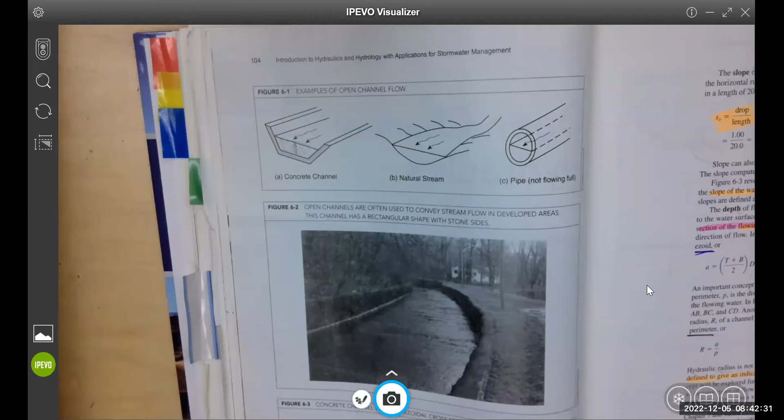We are going to move into, that's weird, doesn't show it. Oh yeah, it does. Open channel flow. So today's going to be just about definitions. I think we'll define 4 or 5 things about open channel flow, and then we'll work our way to what's called critical depth and some flow rates. So this is not my area of expertise. I'm going to hack my way through it. This is very civil engineering, but it's also fairly interesting and not too difficult in the beginning.

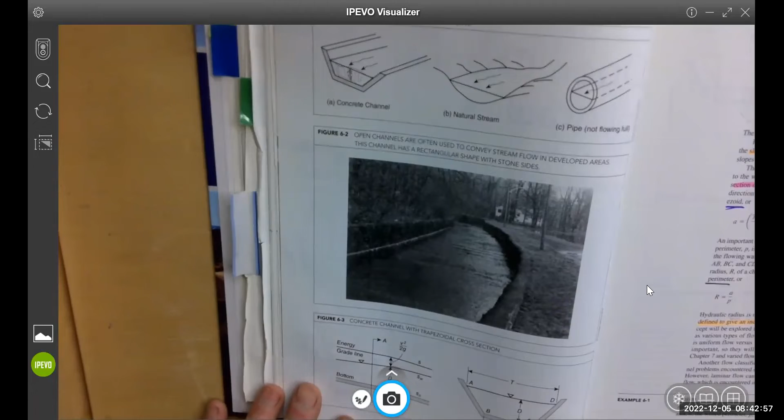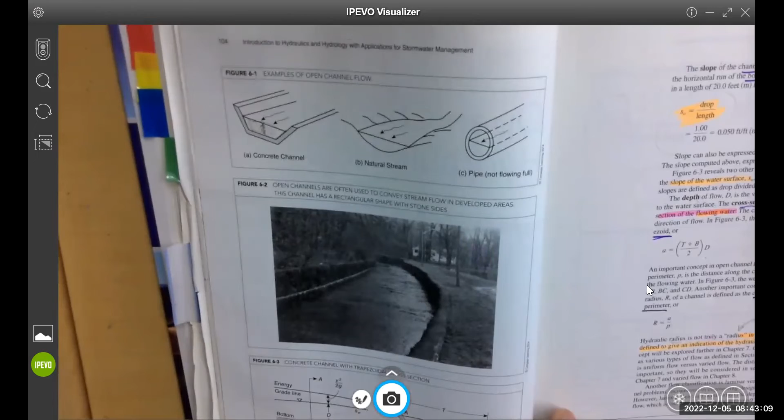So what we're looking at is these kinds of systems that transport water long distances over very low grades. So they're called channels or weirs. Oh, wow, lights are out. They can be concrete channels, right? They can be natural type streams. We did a little bit of that already. Not very often are they full culverts, but I think they do exist out there somewhere. They can be concrete or earth. You see them all different ways.

The things that we have to define so we can move towards flow rate is this information and this information. So we all know what a cross section is. That's chopping the channel to give us a cross-sectional view, right? So we'll need both of those. We'll need this side view and some information. And we'll need the cross-section to get things like wetted perimeter. So our goal is not just the depth, but what's called the critical depth.

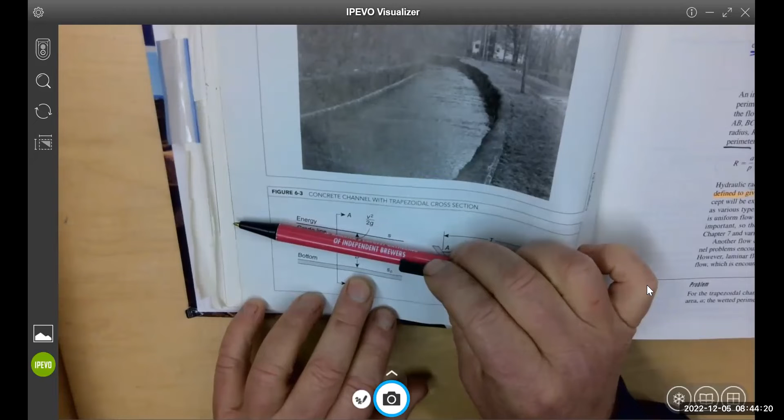So if you think about this thing, it's not a stagnant piece of water, right? It's moving. So we have friction on the sides and the bottom that's actually holding the water back. And then we have a slope that's trying to get the water to flow. So water's going to sit pretty close to horizontal in a channel, right? It doesn't sit parallel to the bottom of the channel. It sits horizontal and then it flows, which is really strange because there are just portions of it that are horizontal. You can kind of see how it moves down with some rippling effect, but it's really trying to find its horizontal, right? It's trying to find level.

So we need to know things like the slope of the bottom, that's S sub O. We need to know the surface of the water and the depth at a cross section. So when we talk depth, it's at a cross section, right? And when we slice it and look at it from this angle, we see the depth. There's a couple depths that we're going to work with. There's the regular depth that could be given, and then there's what's called a critical depth.

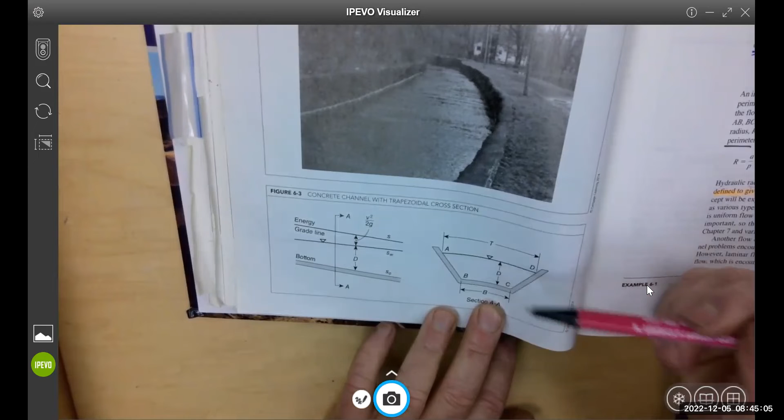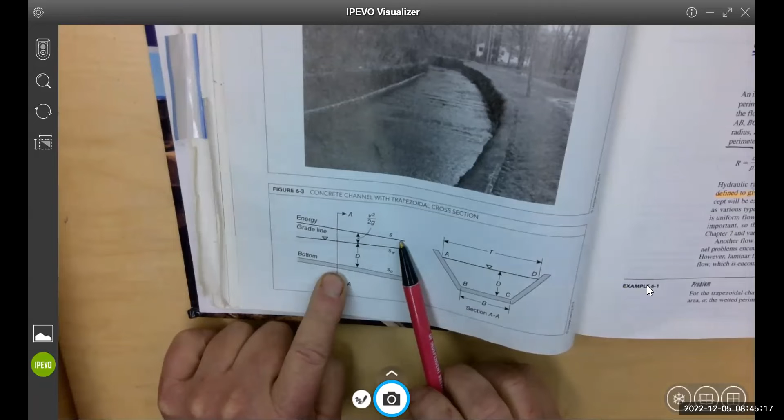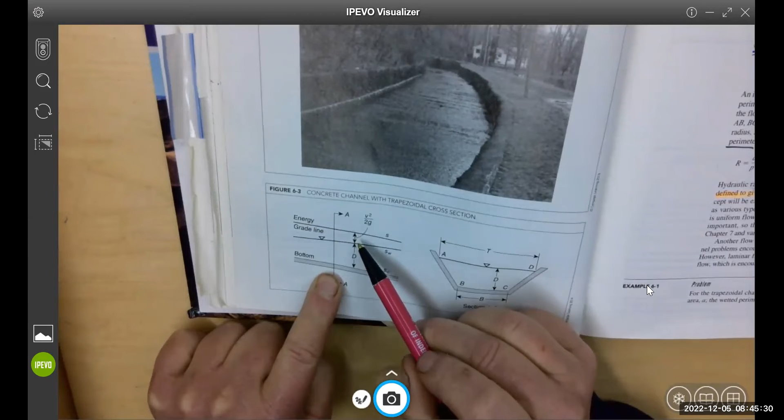But that'll be on Wednesday when we calculate those. Then there's this thing called the energy grade line. The energy grade line is parallel to the bottom surface, so it's parallel to the slope. Okay. And then the kinetic energy due to the moving water is this distance right here, the difference between the energy grade line and the water surface.

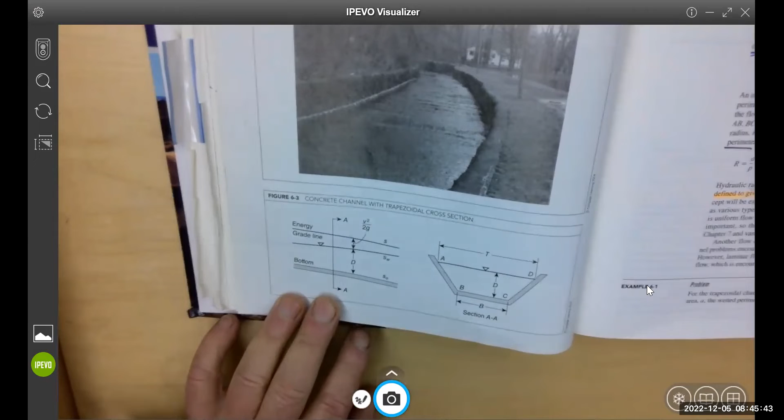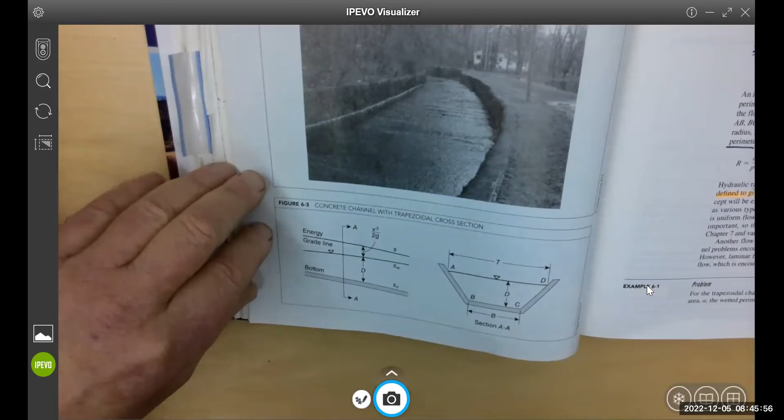Okay, so obviously the energy grade line is not a real thing. We can't see it, right? But we can actually calculate the EGL, energy grade line. There's also something called a hydraulic grade line, which we may calculate if we get that far. All right, so this is how it sets up. What we need to do is be able to calculate a few things just based on information given to us, like the slope.

Slope's pretty simple, right? Everyone knows what slope is. Anyone know what slope is? So I'm going to call it S sub O. Yep. Say again. Yeah, rise over run. That's exactly right. So the term that they're going to use is vertical fall. So that is the rise.

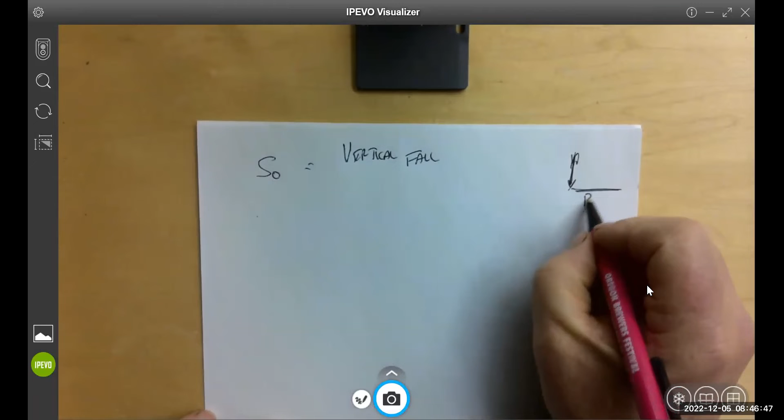So if we have, oh, yeah, sorry, I need it up there though, because I'm going to be here. Focus. There we go. Right, so that's the vertical component, rise and run. This is normally run. So they're calling it vertical fall over horizontal run. Right?

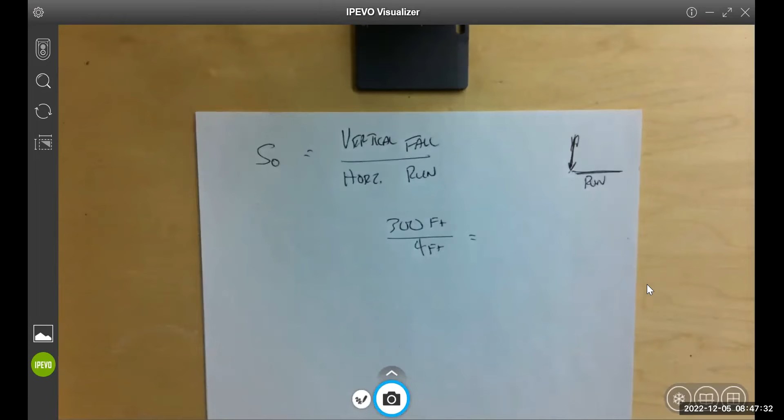So if we have like 300 feet of weir or channel, right? We're going to transport water 300 feet and we have a fall of 4 feet. We would get this slope. So what's that give us? 300 divided by 4. Oh, I got it the other way around, don't I? Yeah. 4 feet. Sorry. Vertical fall's on top. And 300 feet. I'm like, wow, 75. That's a big number. Right? It should be pretty small. Less than 1.

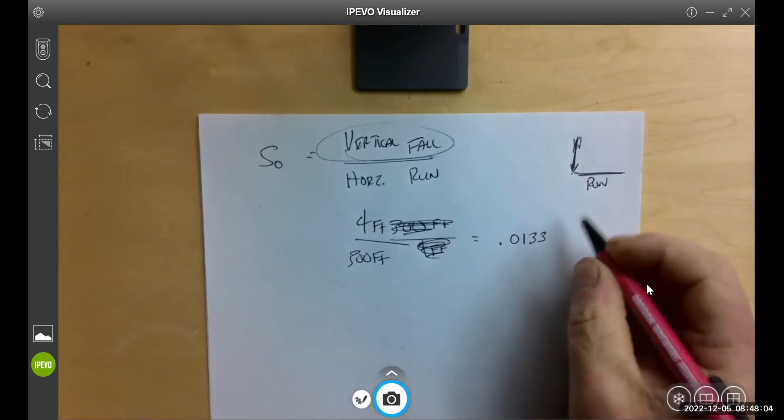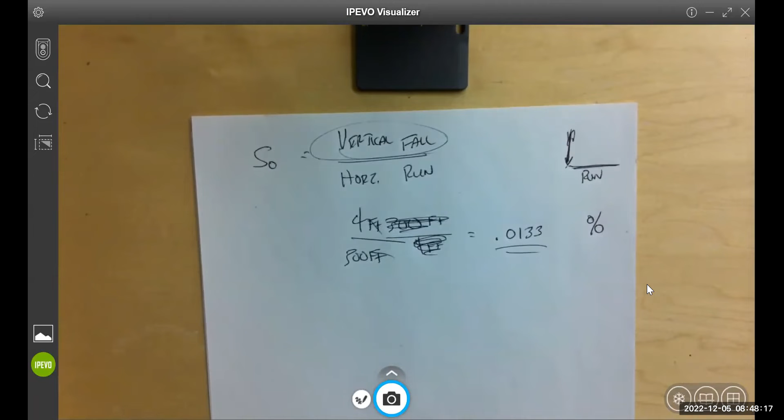So what's that? 0.0133. Right? And the units are none, unitless, because we have feet divided by feet. So that's the slope, but we also often give the slope in percent, right? So if we just multiply by 100, we get 1.33% slope. That's a pretty common ratio. 100 to 1, 300 to 4, all of those kind of ratios are going to work well

with open channel flow. If you get it going too fast, if you have too much slope, then your water is going to turn turbulent and you'll get a number of problems from that. You'll get your weirs, if they're natural weirs, you'll get some eroding in those channels. If they're concrete, not so much, but we don't typically want a turbulent flow. It's just less efficient. Much less efficient.

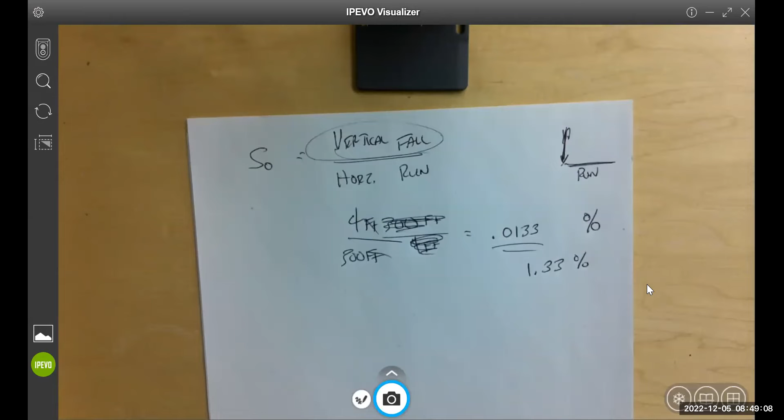All right, so the other thing we need to be able to calculate is wetted perimeter. So if I have a channel that is rectangular, let's say it's 5 feet deep and the water is 3 feet and we're 6 feet here. The wetted perimeter is just what it sounds like. It's the wetted area of the channel. So we're going to use wetted perimeter, we're going to use slope, we're going to use hydraulic radius, all of these things that we want to define and be able to calculate. Once we have that and some friction factors, we can come up with the flow rate of these channels.

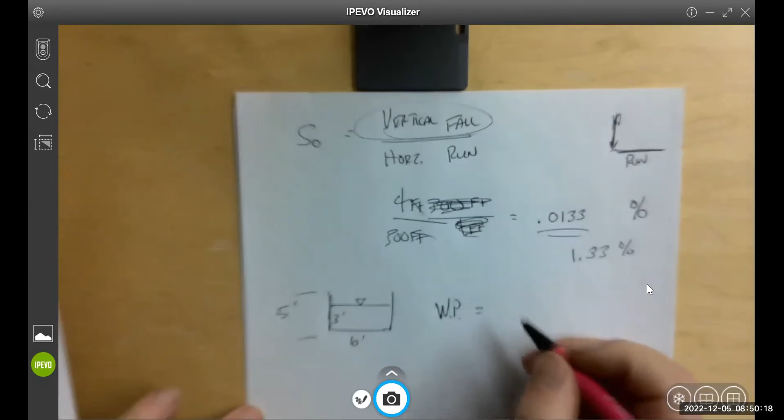So wetted perimeter of this, and I just say wetted perimeter with a WP. I'm not sure what they use for wetted perimeter. Just P, looks like. How much? 3 feet plus 6 feet plus 3 feet, right? Yeah. 12 feet.

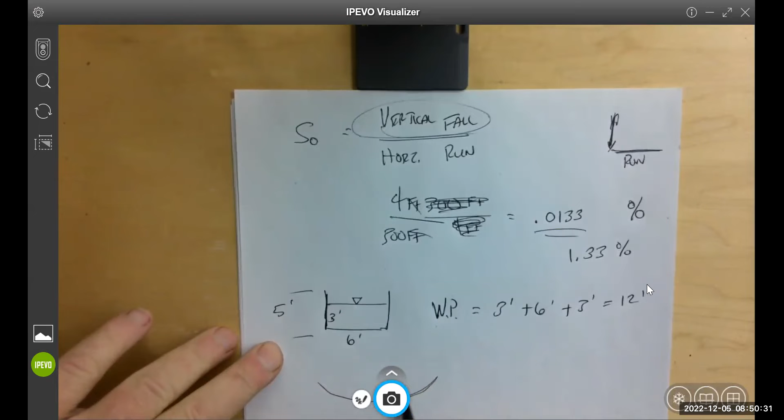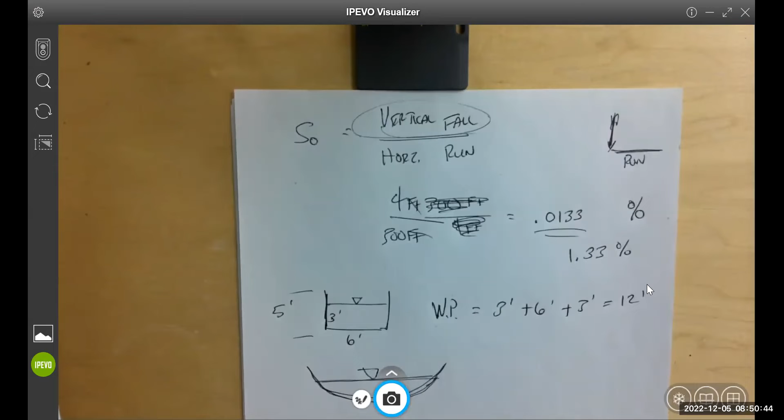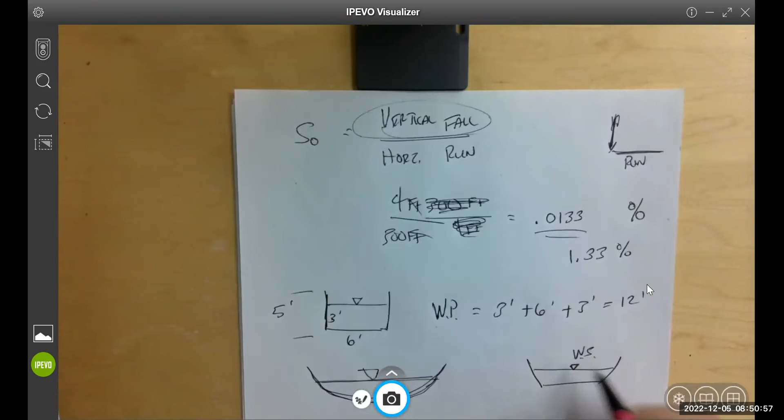A little more challenging if you get a channel that looks like this. Then we need some length of arc calculation, so you might have to look that up. I think they have some arc length calculations in the book, or even a trapezoid, right? And this usually is water surface. A little triangle. So this can become more difficult if it's just not rectangular. If it's one of these other shapes, we still need to be able to calculate the wetted perimeter.

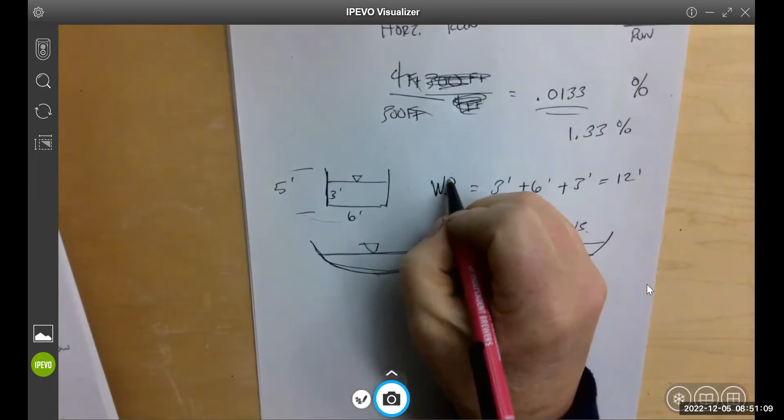Next is hydraulic radius. I use HR. What do they use? They use just R. And the hydraulic radius is the area divided by the wetted perimeter.

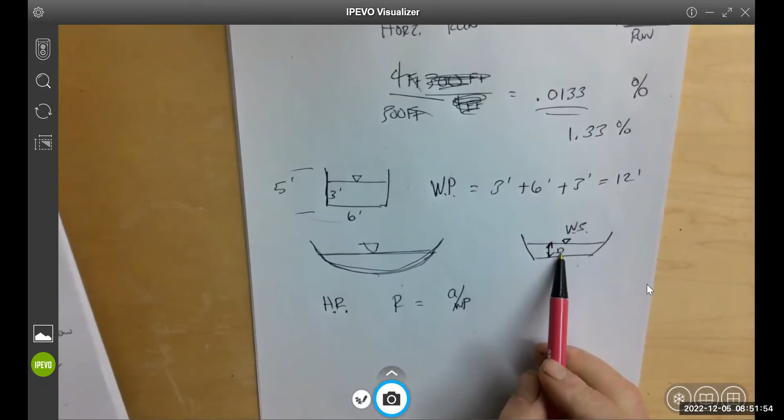Again, these numbers are going to combine so we can calculate a critical depth. And from a critical depth, then we can calculate a flow rate. So if we don't know this depth, D, then we can't get a number of things. We can't get wetted perimeter if we don't know the depth. We can't get the hydraulic radius if we don't know the depth, right? So if the depth is given in the problem, that's a simple problem. You can just calculate a lot of stuff and go for it.

But if we don't know the depth, like if we're doing design work and we know kind of the slope and we know how far we want to travel the water, that could give us the slope, but doesn't give us the depth. If we know how much Q we want, flow rate, but we don't know channel size, right? We have to work it from a lot of different angles.

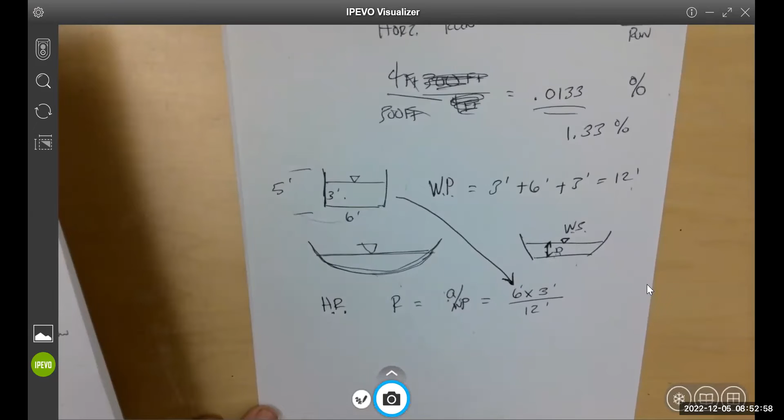So if we look at this one, we should be able to get the hydraulic radius. So R is area divided by wetted perimeter. So the area of this one is 6 times 3, right? And those are feet. And then the wetted perimeter is 12 feet. 18 divided by 12. 1.5. And what's the units of that? Yep. Which makes sense, right?

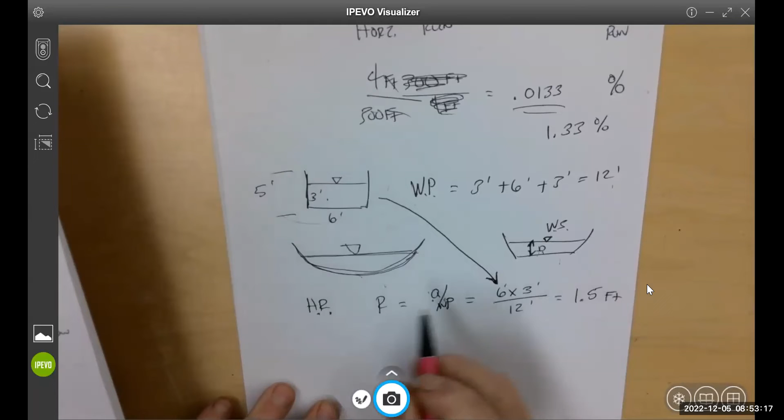It is called a hydraulic radius. I don't know if you all remember radius of gyration, same kind of thing. Radius of gyration was in strength of materials, had to do with the cross-section area of a beam. Hydraulic radius, similar thing, has to do with the cross-sectional area of a channel.

It says a hydraulic radius is not truly a radius in a geometric sense, but merely a term defined to give an indication of hydraulic efficiency of a channel. There you go.

So weird when that light goes out.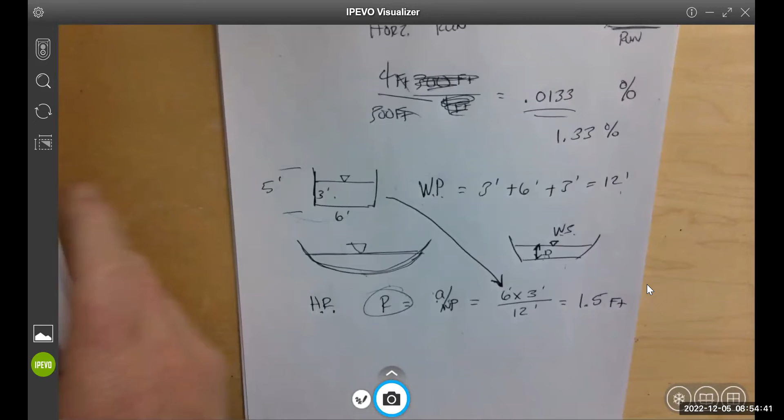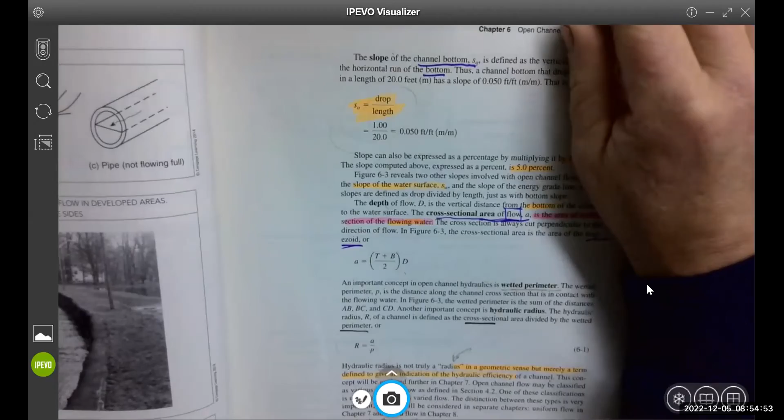So in the book, they talk about types of channels. This is actually a pretty good chapter to do some reading, because we just did kind of this beginning stuff and your homework's going to be on that. Then we're going to go into critical depth, right? And try to understand this critical velocity from our critical depth.

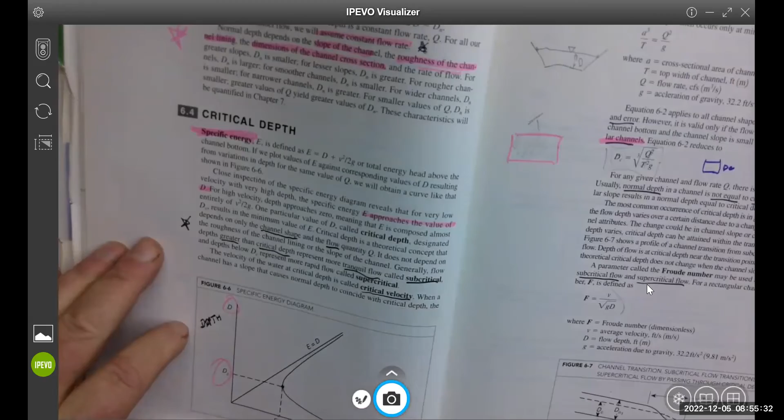And this diagram, here's your depth of your channel. Your critical depth is like this convergence between this energy grade line and this E to D line. So we have to be able to kind of graph the channel to come up with those numbers. So once we go through critical depth, then we'll move into this calculation where we have a Q finally. We have the top width of the channel, that's this T. We're going to get our flow rate, cross-sectional area, and then gravity, right?

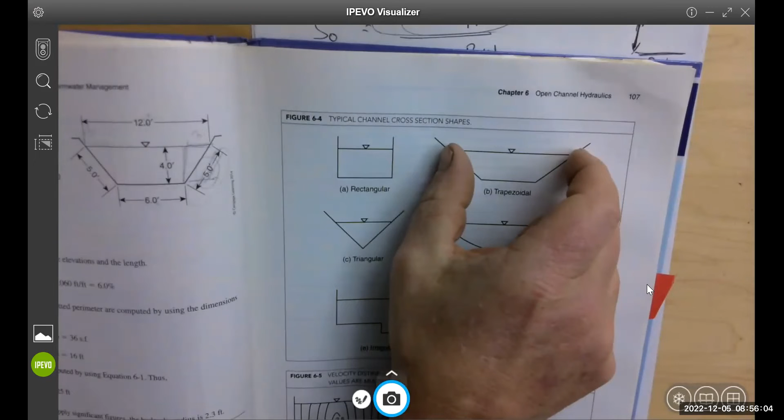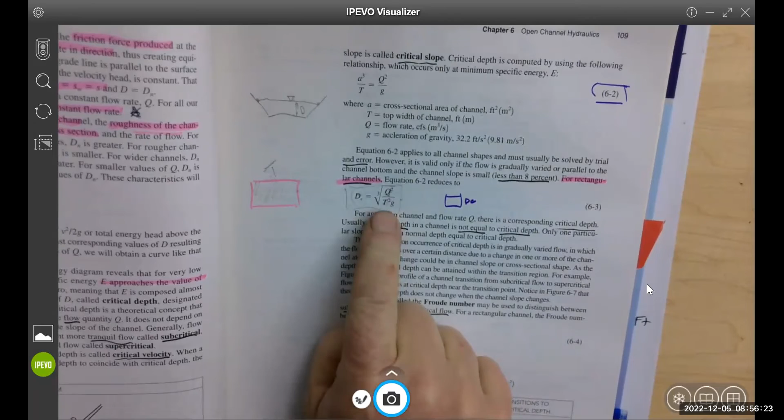So the problem with the top width of the channel is we would need to know what? To get the top width of the channel, we need to know the depth. So everything is kind of driven off this depth thing. If it's given, like if we can just go out and measure it, then we can come up with Q right away. If it's not given, then we have to calculate it. And that's going to be this equation. So we'd need Q, right? So it's kind of a game of these equations and what we know and what we don't know and choosing the correct equation.

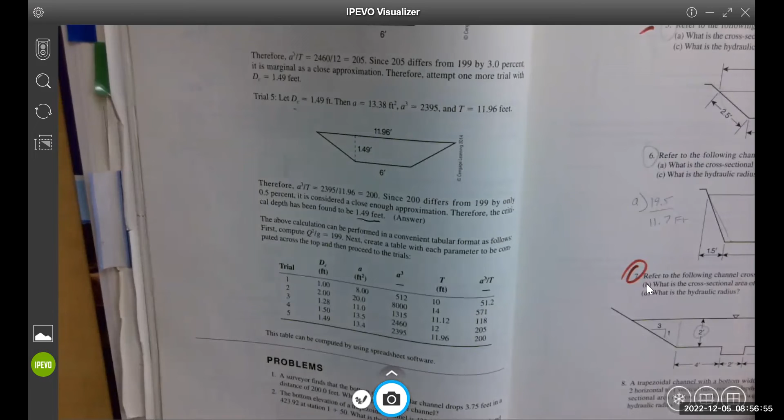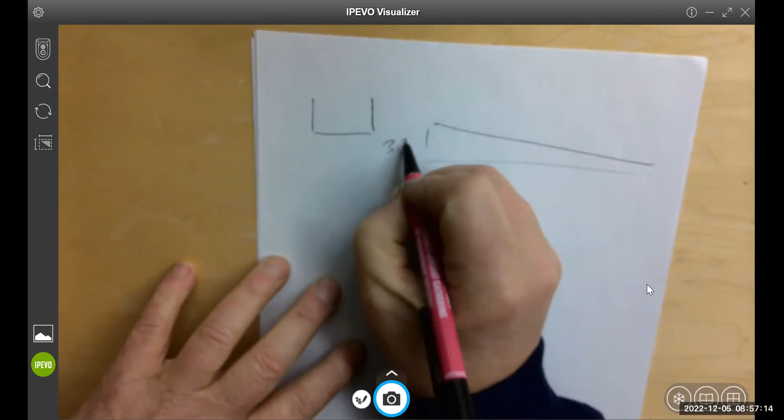All right, let's do just a simple homework problem. These first ones are going to be pretty simple. We can work number one together and then we'll move on. So number one says a surveyor goes out, finds the bottom of a rectangular channel drops 3.75 feet. So we have a rectangular channel. So there's a cross section and then it drops 3.75 feet, distance of 200 feet, right? And they want to know the slope. So find the slope in percent. That one's pretty easy.

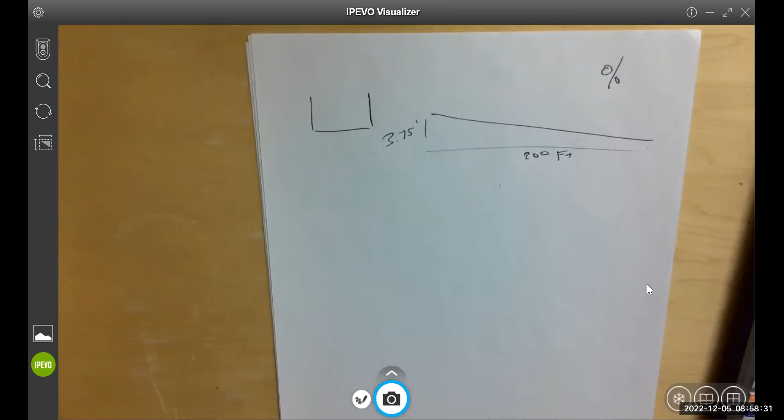What do you get? Yep. 1.88%. Yeah, then they just go on with the channel calcs. Like, you know, find the wetted perimeter of this. Pretty simple. You'd have to know these angles out here. 3 feet, 1 feet. Yeah, we should be able to calculate that.

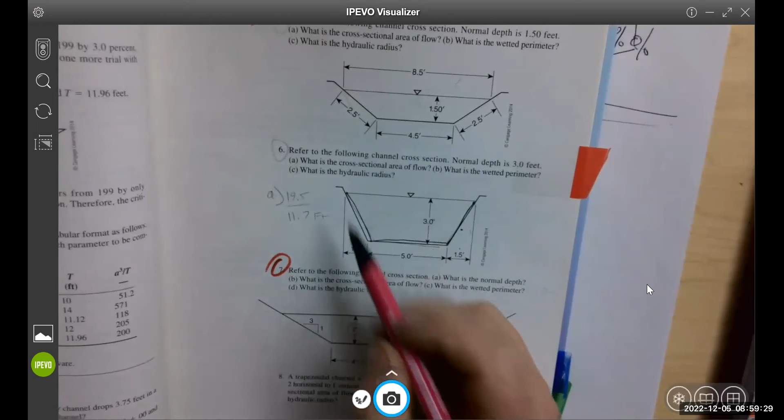So like on number 6, we want a wetted perimeter. Remember, it's these lengths. So you're not going to always be given that, right? This you'd have to trig out knowing that this is 3 and this is 1.5. And then the area of the flow. So once you have all that, you could calculate the area.

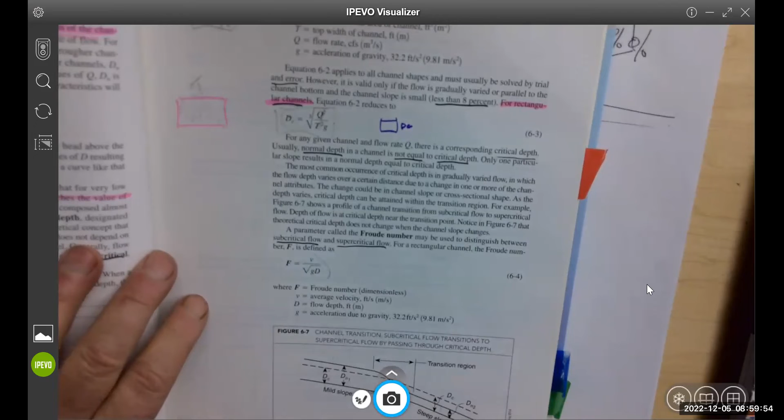They have an example problem. They just go into all the trials. Yeah, they don't do any simpler ones.

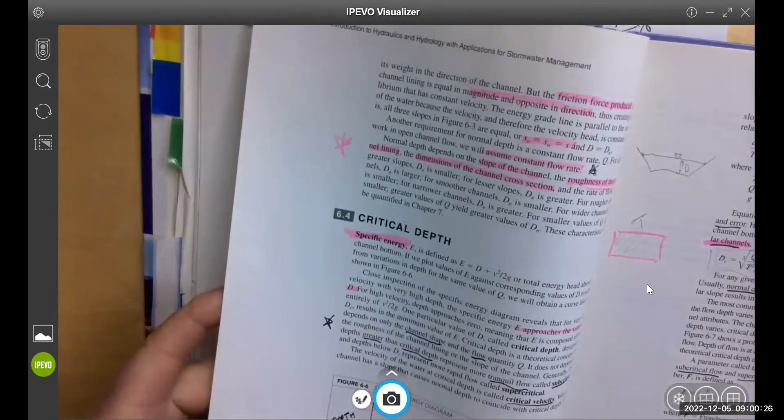Yeah, let's wait to do those. So their example problem, their first one's pretty simple. That's this one, essentially what we're just doing.

And then the next example problem, they go into their trials. So this one says find the critical depth in the trapezoid channel, having a bottom width of 6 feet and a 2-to-1 side slope. The channel's lined with concrete, good condition, carries 80 CFS. So that's important. If we're given 80 CFS, that's the Q in this equation, right?

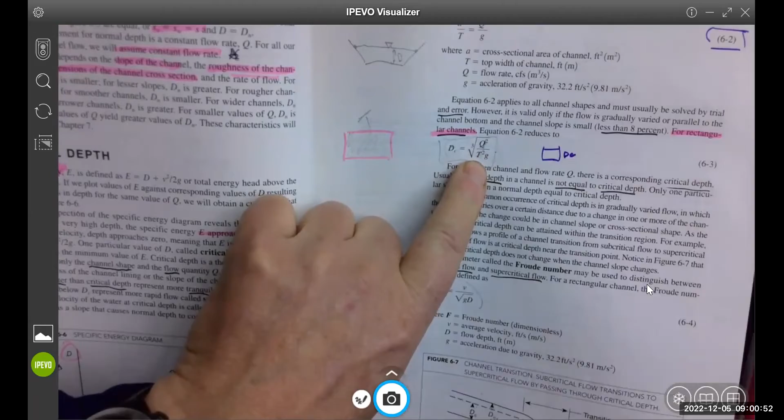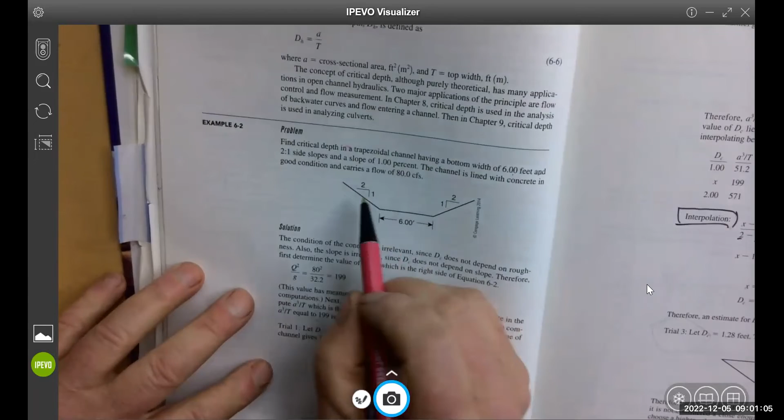So we should be able to come up with a top. Did they give us more than that? No, they want the critical depth first. So since we don't know the depth, right? We don't know D.

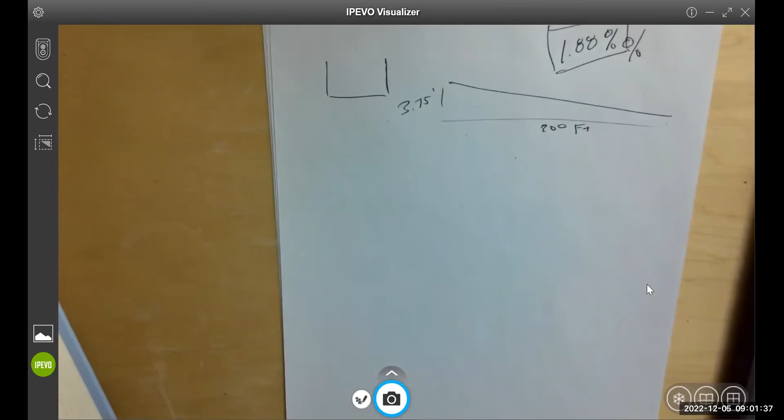They go through this trial. One, let DC equal 1 foot. Then they run equations. Okay, so this would be really good for you to try to work your way through using these equations. Like your homework's going to be pretty simple. You're just going to calculate slope, wetted perimeter, area, right, of different channels in preparation.

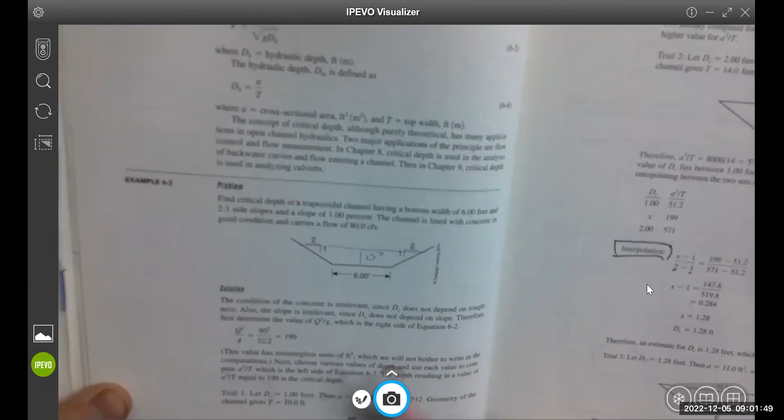But what I'd also like you to do is work through this example problem 6.2 and try to figure out how they're doing this. Well, what they do is you really need a critical depth. You really need a critical depth to run those equations on the previous page. If you don't have it, you can't do it, right?

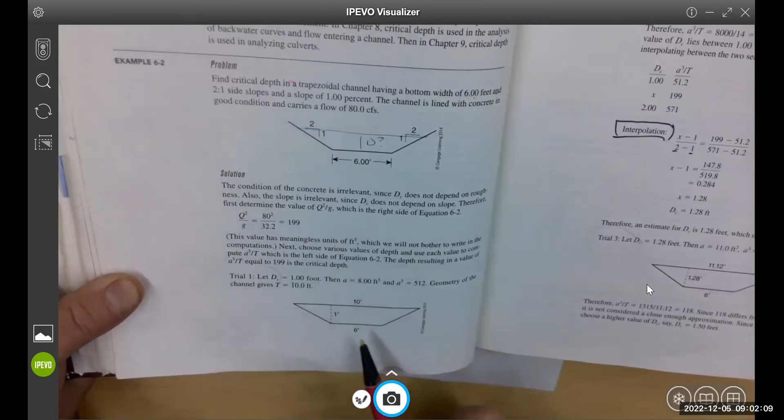So they're gonna have some target numbers when they put in their critical depth of 1 foot as a trial. Then they can calculate some things, right? They can calculate this area divided by T at 51.2.

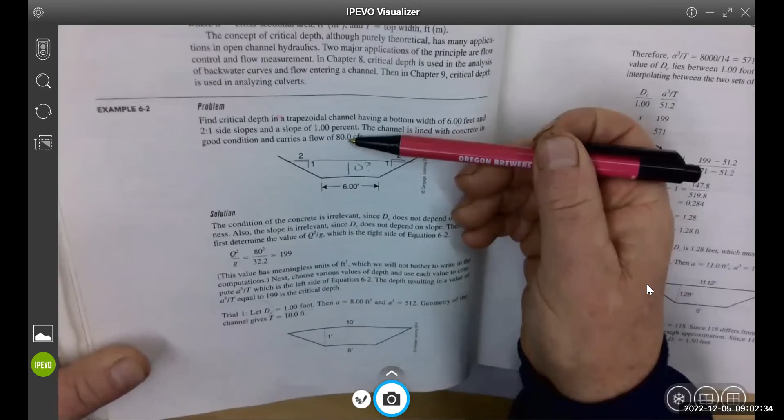It says this value is then compared to the value of 199 already computed for Q squared over G. So they took their Q and they divided it by G. They square it and divide it. So that equation is essentially this equation here.

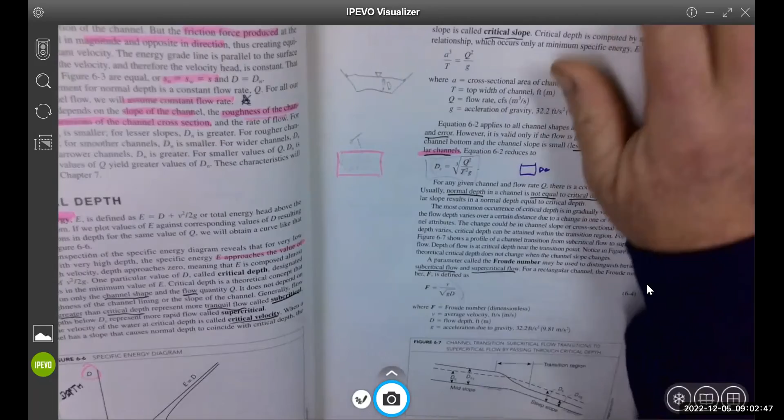So anyway, it's pretty tricky how they do this. But they ended up with this 199 as the target, right? And they got 51.2, so it says, oh, choose a higher value. So then they went to 2 for the critical depth.

For their second trial, and again they run these numbers, right? And T gives us 14 feet. So then they run through again, and now they're at 571. 571 is greater than 199. So the correct value of DC lies between 1 and 2.

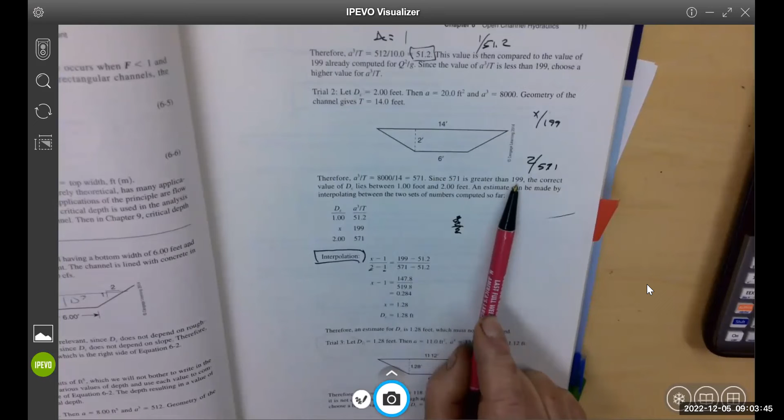So it is this kind of trial system where you start with a critical depth of 1, then they did a critical depth of 2, and now the number is greater than the 199. You'll see where they get the 199. It's this A3 divided by T, right?

So then they can go to trial 3 and they use this 1.28, and they did that through interpolation. So if you've not done interpolation before, it's how you determine a good guess between two numbers based on information, right? So the 199 minus the 51, the 571 minus the 51, and then you can solve this down to a decent guess.

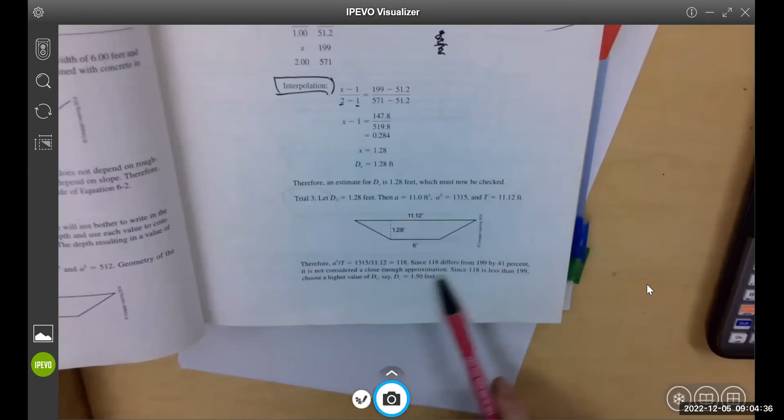So I would say spend some time on this one, and then we'll do some problems like this, and I think you'll kind of get the flow of it. But in the end they come down to an estimate for the critical depth, and from the critical depth then you can get like channel dimensions and water flow.

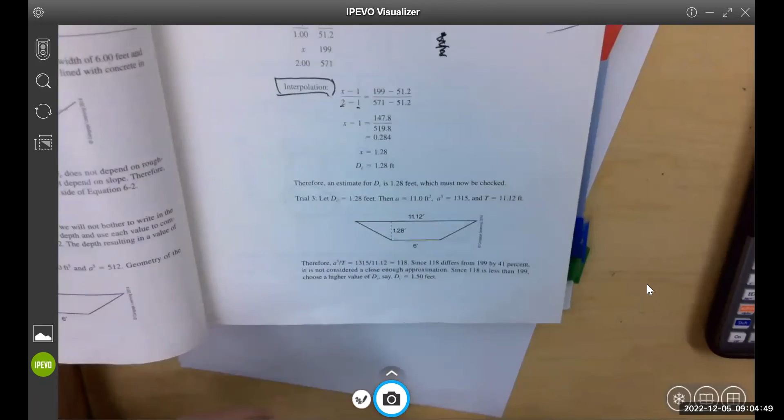So it's a long example problem, but if you understand the first trial, then you can just make more trials. I think they go through a second interpolation. No, they don't.

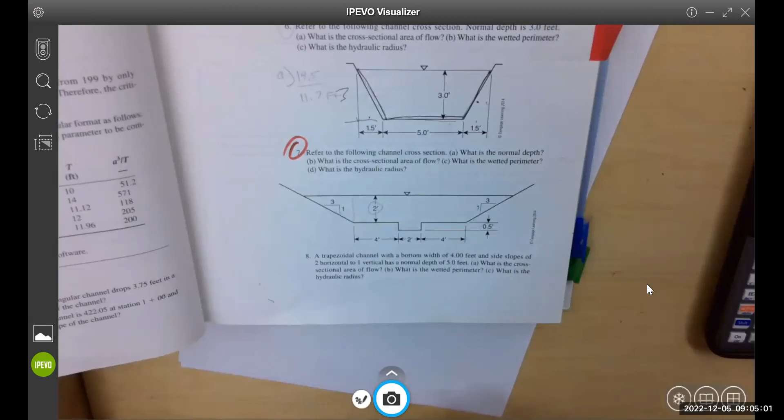But they did kind of table it out, right? In the end, trial 1, and then all the numbers, trial 2, then all the numbers, trial 3, 1.28, then the numbers, trial 4, 1.5, trial 5, 1.49, gives you 200.

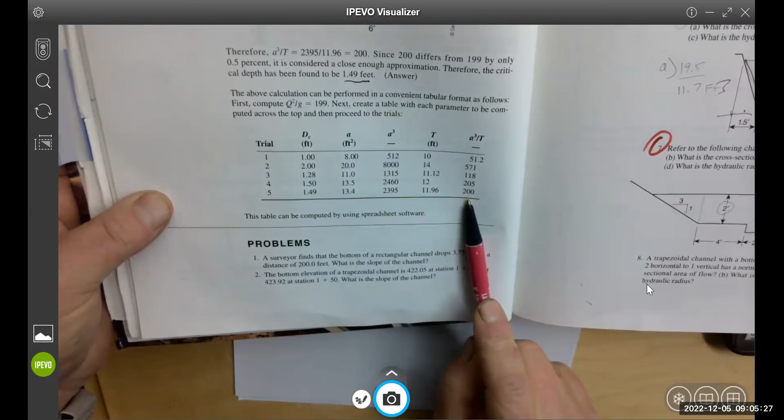Remember, the target number there was 199, so that's pretty close. 205 I thought was pretty close. So,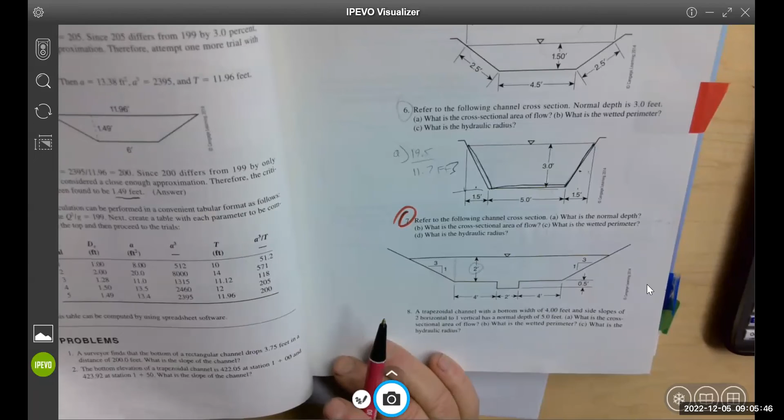All right, so your homework is not that yet, but that's what we'll do on Wednesday. We'll try to grind through a couple of them in class. I think you're going to do 2, 3, 4, and 13.

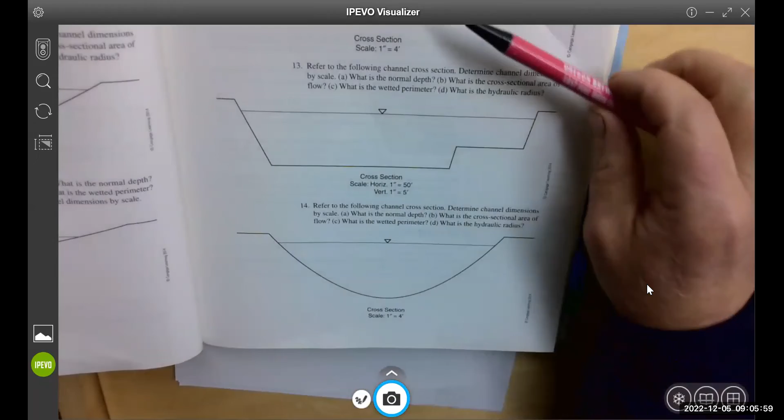Yeah, 13. So on 13, so the diagrams are below. It's kind of strange, but diagrams are below the number. So this is our diagram for 13. And it says refer to the channel cross section, determine the channel dimensions by scale.

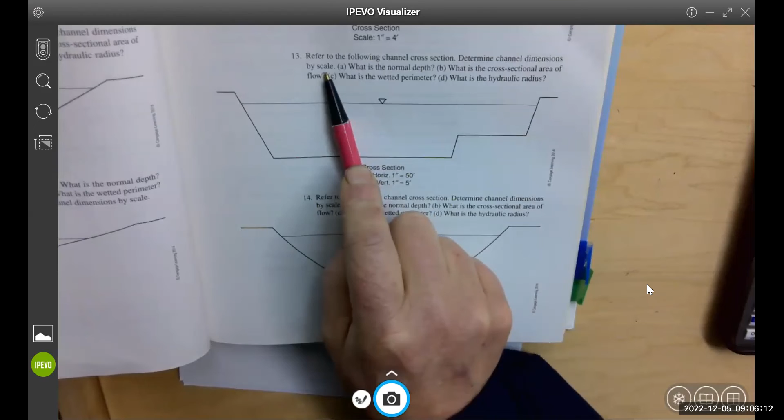So here's the scale, 1 inch equals 50 feet. So you'll have to figure that out. Like, hopefully you have a ruler of some kind. Even a measuring tape will work. 1 inch equals 50 feet. So from here to here, that's 50 feet.

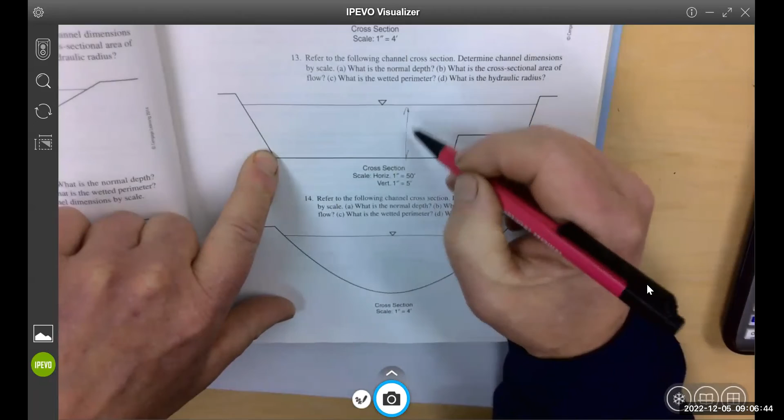And then the vertical, 1 inch equals 5 feet. That's weird. That's weird. So good luck with that. But then we just want the normal depth, and the normal depth is the greatest depth, just so you know, D. And what is the cross-sectional area of the flow? That you'll have to calculate. AutoCAD would be sweet for this, just saying.

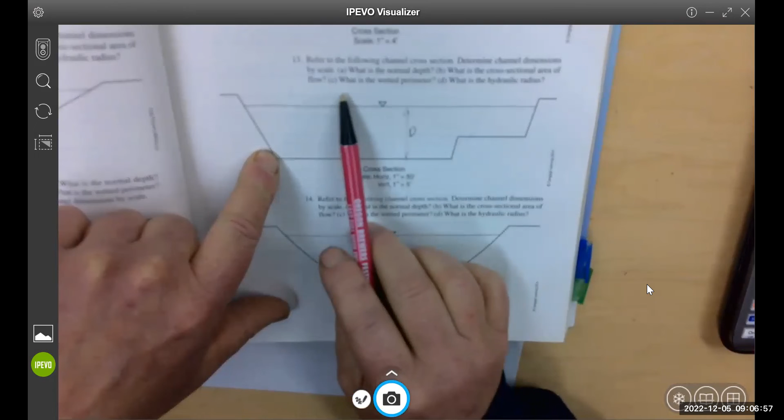Yeah, what is the wetted perimeter? That's all the wetted area. And what is the hydraulic radius? So problem 13 will take you a bit.

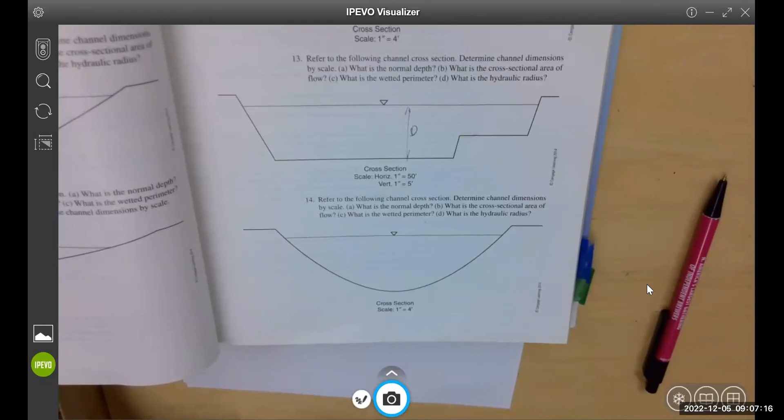Yeah, there's a pile here. Yeah, the gutter lab, how'd that go?

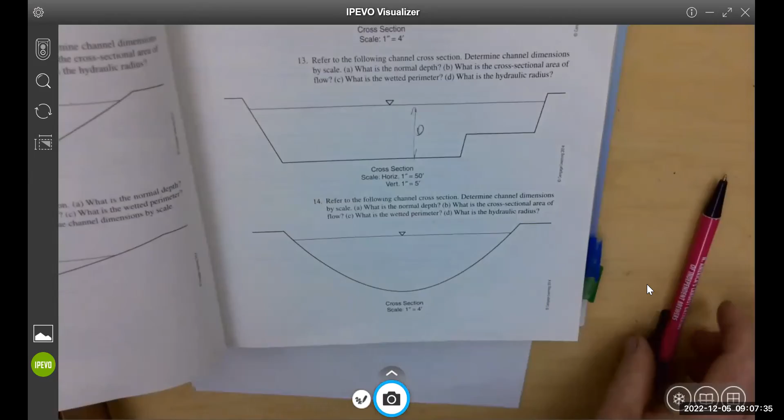How'd the gutter hold up under the work? I don't think the downspout worked. The gutter 100% does not work in the 100-year storm. Absolutely not, not designed for it. So it overflows, and if the gutter doesn't work, the downspout definitely doesn't work. My gutters are so clean right now, but when we get that thunderstorm, they just overflow like crazy. So they're not designed for it.

I think the mesh covers are great if you don't have a whole bunch of material coming down. Like I have maple trees around, and maple trees stick to anything. And I have a metal roof, which doesn't help, so they just stick on my roof and slide down. I have those - not the expensive screens, just the cheaper ones that clip onto your gutters.

I have them on the high side of my house, which I'm not getting up there to clean. In average rain, they work fine, but in the fall, when everything falls on them, they don't work for a while until it washes off. You don't want the plastic ones - they curl up over time and catch everything. The aluminum ones are better.

Yeah, much better. They're more popular now, but I've heard they can stain the paint, like the stuff that gets on the wood. Oh yeah, they do for sure. There's lots of good design opportunities in gutters because there's no good solution out there. Leaf guard's great, but if it rains hard at all, the water just literally misses the gutter.